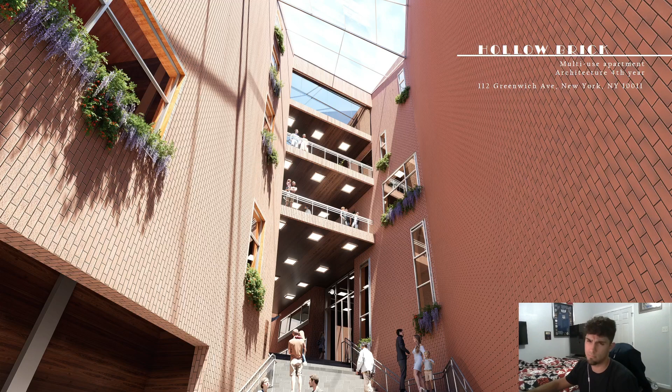Don't worry about that. First project, Hollow Brick, 4th year project, my most recent.

Most recent, last studio I had, having this main thing as the focal point. I kind of wanted that punch in the face for you. The same way when I flipped it, it visually struck you a little different. I think that's great, that was the point.

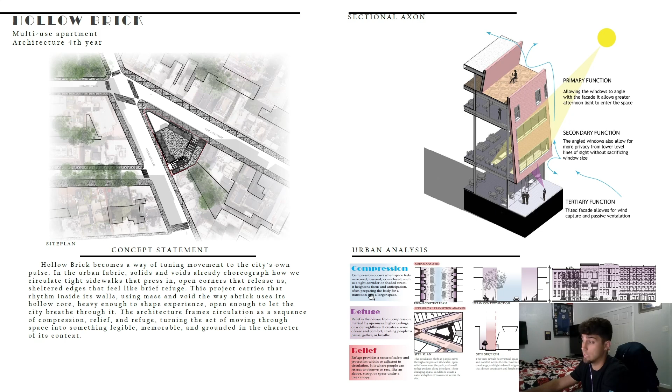And then I do admit, urban analysis right here, we do have probably a bit too many words here. Beautiful colors I think, and quite nice renderings, quite nice elevations and drawings, and that really gets my point across in the grand scheme of things. I could probably get rid of all of this, there's almost no need, and just to give the drawings a bit more real estate here, I think would be a little more successful.

So on the next slide we have it really grounded. Don't be scared to use a little bit of black, don't be scared to do full page full color. It gets somebody interested in the drawing, in the thing. If it makes them pause, it takes up space in their mind, it's gonna do more good for you than hurt you.

Now don't make every single page big, then it loses its punch, it's not gonna hit them the same way. Where if you have information, big spread, and then a few more informationals before a big spread- if you do a big spread, make sure it makes sense, make sure it gets the point. Now, that saying...

You can kind of see here you have this big cavity inside the building, which is the main reason why I had this, and also these stairs. I just wanted to show the connection of the building between this massive stair system and obviously volume with this one. Could I have taken these two walls away so you can see a little more through, so you can see into that library, so you can see into the retail space in the hallway?

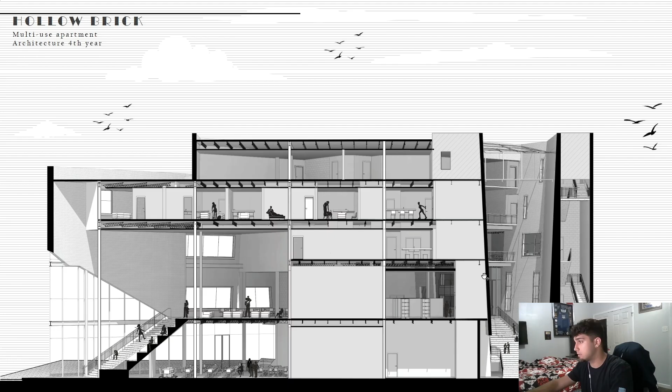Depth is so key when you do sections, and this was a big learning curve for me, a learning opportunity to see how people really respond to sections. What do people see? Are they really looking at this itty bitty wall that comes above the ceiling? No, what they're looking at is how this relates to the rest of the building, what it actually is, and where's the depth. Anywhere with depth, that's where their eyes go 100% of the time.

These people right here, you probably never noticed, but I bet you noticed all these people, the depressed dude here and the people sitting on the stools before you saw that. Your eyes go to depth and color contrast, always. That's hierarchy in drawings. Even when you do drawings, there needs to be hierarchy, or at least the thought of it. Not too much here, but you live and you learn - you gotta break a few eggs to make an omelet.

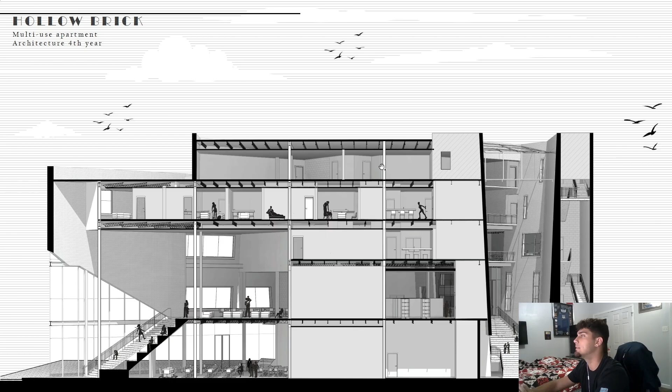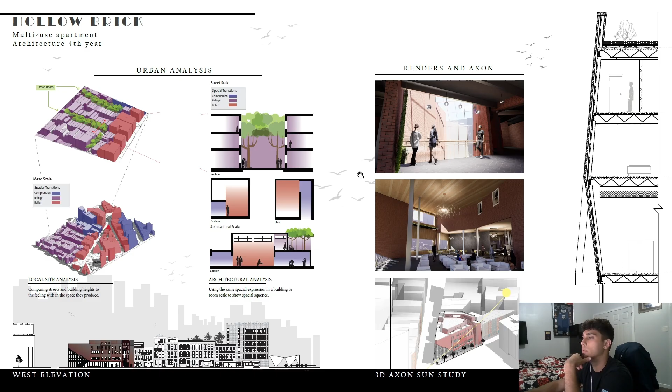The residual, second year project, actually my first architectural project. Quite proud of it, I like it. Came out good, took forever modeling, but I love it.

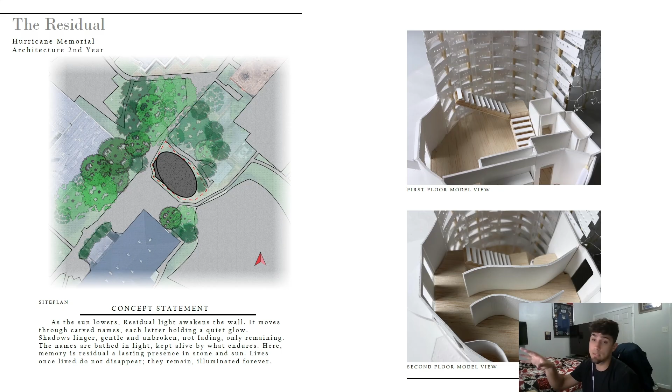And to nitpick some more, bringing this first floor on the first level and second floor on the second level so it makes sense stacking, so confusion's not really there. If you're showing stairs for the most part and it makes sense, like maybe the image is a little more displaced or a different sizing, I would always crop it to make it look good or fit most of the time. But if you just can't, and it makes sense this way if you're showing stairs, most of the time you don't have to worry about it. It's pretty intuitive that this is the first floor, but if you're watching this video, you probably know that.

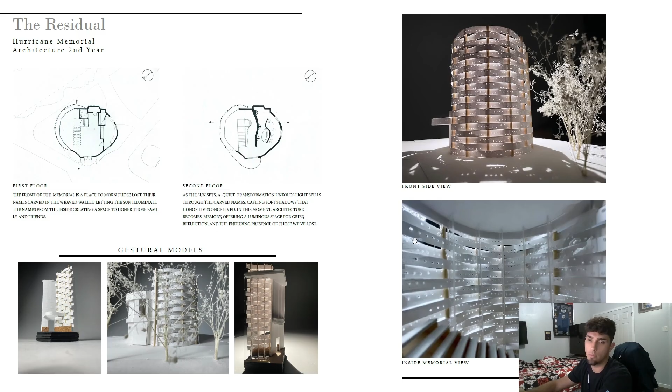So right now we just looked at it. We're here. I'm done, I'm bored with the page. I'm looking at floor plans, I don't want to look at floor plans. Bam, you get color punched again after your eyes just went around the page.

Next slide, we have site plan again, a little different than the rest. Black, white, line drawn, pixelated, could be better. But this is kind of an excuse of a concept statement, but fix that later.

So we have process models. This kind of situation is a little off. Maybe if this was the same font as this and it lined up, it'd be a little prettier. And maybe if this line and that line were the same weight, it'd do a little more, but that's nitpicking.

We have this very strong on the page and prominent gestural models that take up good proportions, a good section of the page, good hierarchy.

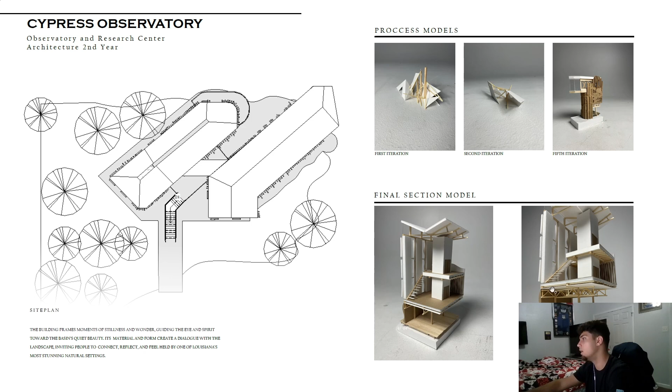So you have some iterations. Okay, that's nice, you started getting a section, and then we're starting to worry about structure. We got stairs, we got bracing, we got elevator.

What's next? It's another full page section. So now you kind of get to see, oh well, this is maybe all underground. The building starts up here. You have kind of this wooded area, okay it goes out to water. These people are 30 feet tall. Great, looks good, gets the points across.

Maybe this doesn't have to be so harsh of a line. It probably shouldn't, it probably should either fade or something of the sort, especially if it's going to take up this much space. Bring this all the way to the edge of the page. Bring this all the way to the edge of the page. And then this doesn't quite make any sense with this. But you gotta break a few eggs.

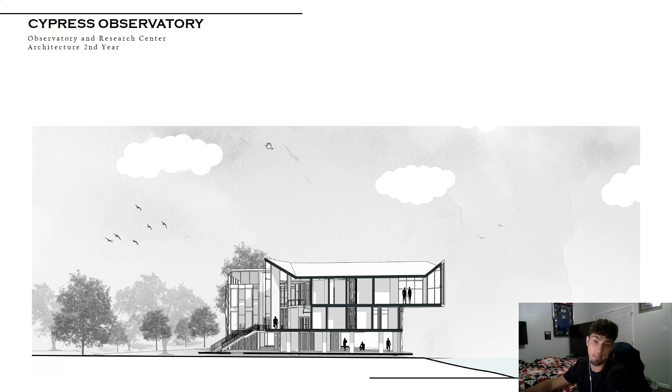Next page. This one I actually was thinking about whether or not to put in this video. I'm not the most excited about this project, but it is something I did, and it is something that was in this portfolio, this older one. But I do want to show it just to show what progress looks like. You're not always gonna have the biggest, the best, the baddest portfolio, and it's always working. At least that's what I'm gonna tell myself before I can get the biggest and baddest portfolio. You gotta trial and error.

You have to work a little bit to get better and better. And obviously this render is nowhere near as good as the first render I showed you, which is also a strategy you can use: put your best project first, and your second best project last. So you have a good note to open up on and you get those people reading, and you have a good project on the end so they forget about the weaker one. Whenever you have this, you don't want to remember it. So we'll go to the next.

Everyone has that one weak project. Unless you're just like that, then you know.

So we have a site plan, same kind of thing. We have this night, and this was a group project for a little bit. Everybody got to develop their own thing, and then it became a group project towards the end, and we all kind of collaborated on one project. Really fun, we did charrettes, we did group studies, it was great. We would hang out. Projects like that may not end up the best because you have to figure out how to work with people and get along with people, but the culture and the groups that it builds really is nice. And I did have a fun time building this.

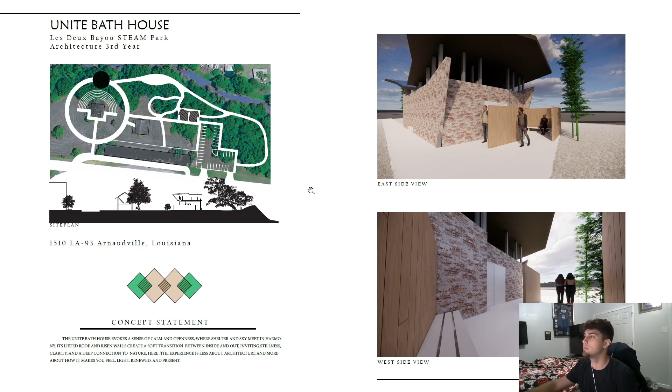So we have some renders I did, not the best in the world. We got the dude side of the bathroom, the girl side of the bathroom, and a brick that was the first thing I could find. You got white concrete, white doors. So, like I said, not the best thing in the world, but process images just to show you that it's not always going to be glamorous going through these projects.

However, there's always going to be some good ones. Section diagram gets the point across. It's pretty, it makes sense. So you have this air circulation, you kind of start to understand maybe these flaps are up to capture as much high wind as they can and circulate it through the bathroom.

Makes sense. Have a floor plan - nobody wants to look at that. Have a wall section, block, whatever - nobody wants to look at that. This could probably take up a bit more real estate, or maybe this can probably get gone. I mean, it's nice, you have an understanding of how a building gets built.

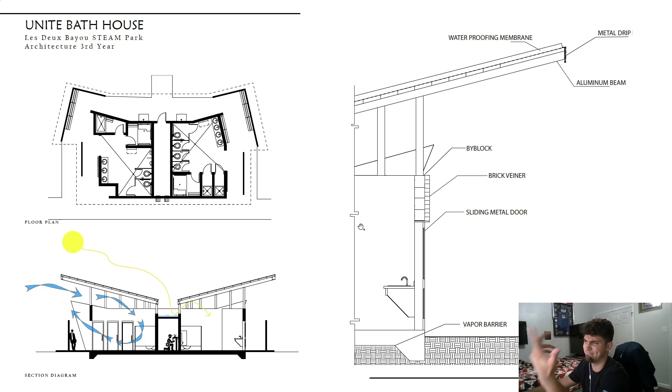Will they? Who knows? But the intent's there, more likely to happen if you do. Also, just use one break line - I don't know why I used three separate ones right here. Just use one and make it an actual break line, not some crisscross, dovetail, whatever you want to call that nonsense.

And then the next project - this is the first one that y'all had seen on the beginning page. Lunex. This was a third-year project that, oh my god, I went through a lot of process to get to this. But this is just a big, beautiful sketch of the actual project, which you can kind of see here, it kind of cuts off. This is when AI and stuff was first coming onto the scene, and you could do like watercolor, you could do sketches, you could do all the things.

So I sketched the elevation of it. Now it wasn't quite all of this, it wasn't quite this nice to be honest with you, and there's a few elements that are kind of missing, and it kind of doesn't understand what's going on. But I mean, it made a nice watercolor.

Now, whether or not you want to put AI in your portfolio is a very, very big thing. Usually a disclaimer or something would be nice. And then the biggest one I have in the current portfolio, you have a D5 AI render, just kind of off right here. It's small, a little small, but you don't want to put it all big and bold and ruin the project. And if they ask you about it, of course tell them.

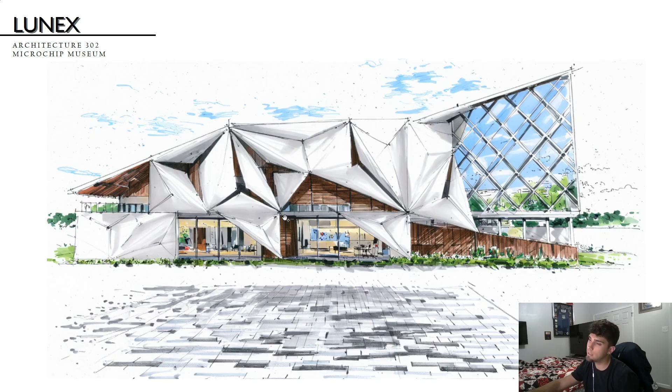It's more upfront, and firms want to know if you can use AI and AI tools. So it's more shameful to hide it than it is to just say, hey, this is AI, this is what I can do with it. Never be afraid to say this is what I did with AI, this is how I implemented it in my process. Just please remember it's a tool.

It's not necessary, it's not the guiding principle, it's not the design. It doesn't even know where the grass starts or why the grass is in the window, you know. But I mean, it will soon. But more on that later.

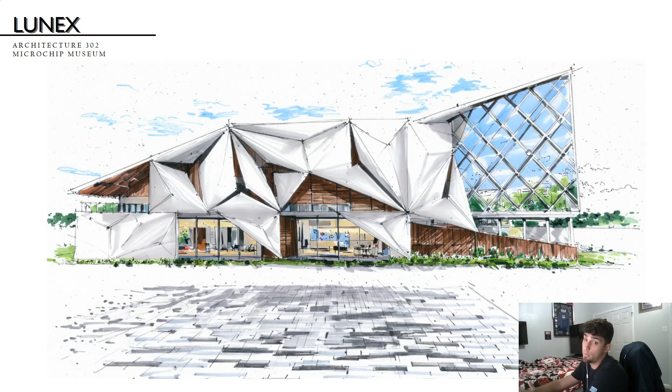What do I have? Group project for ARC 302, something like that. Just let them know, hey, this is a group project, this is what me and my group did, this is what I can do in a team. Employers want to know you can work well in a group, and you don't try to claim people's work as your own.

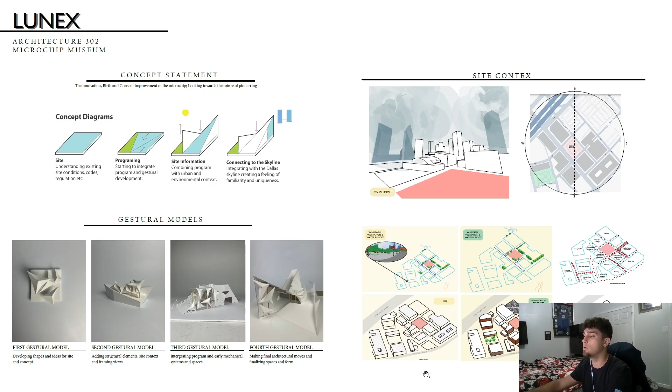It's a little gray area in portfolios because you need to show some of it for context. Obviously this right here is mine, and this is mine, but you don't always know what is group and what's yours. When you work really well in a group, none of it feels like it's yours because you all work so collaboratively together. So you usually just put a nice little tag, mine's right here on the new one, made in group, contributions, or whatever the tag is.

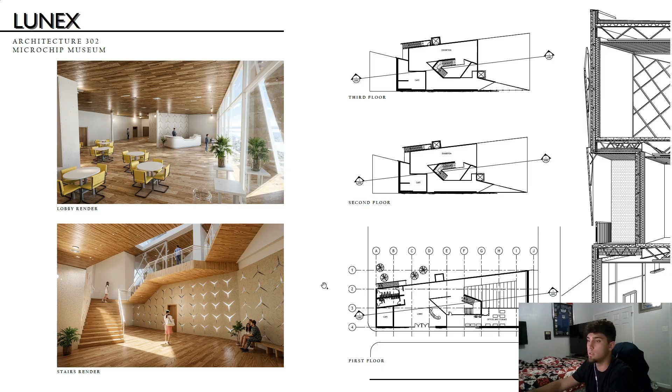Also, this is not enough roofing insulation at all, and there's really no concrete or deck, so it could probably use some updates. Kind of shows these panels how they reach off. Pretty cool stuff, looks pretty, but functionality-wise, to be decided.

So that's my biggest thing. That's kind of where my portfolio is at. Making changes to it now.